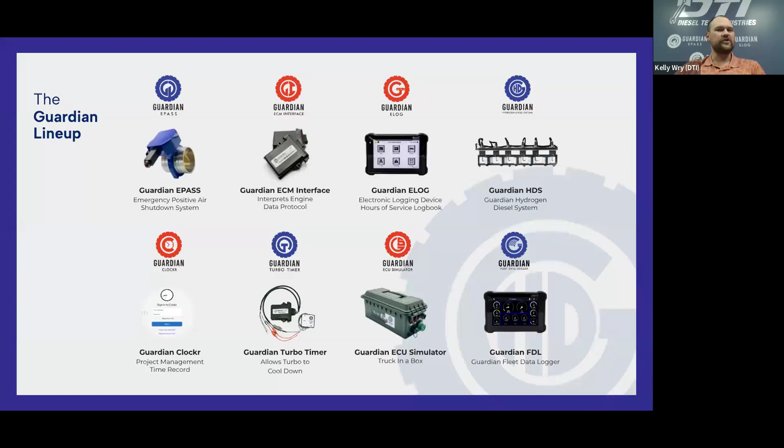So to get right into why we're here, of course we have the regulatory requirements to reduce greenhouse gas emissions by 2030 and 2050. On the Canadian side, our provincial or federal government went with net zero across the board. The assets are super expensive and they just don't fit in a lot of situations, and growing out that hydrogen infrastructure doesn't happen overnight. So what we ended up doing was maximizing the economics for fleet operators and giving that competitive requirement for everyone across the board. So if you're a fleet of 100 or you have 2 trucks, this is an option for you. It's very cost effective for what you get on the back end of things.

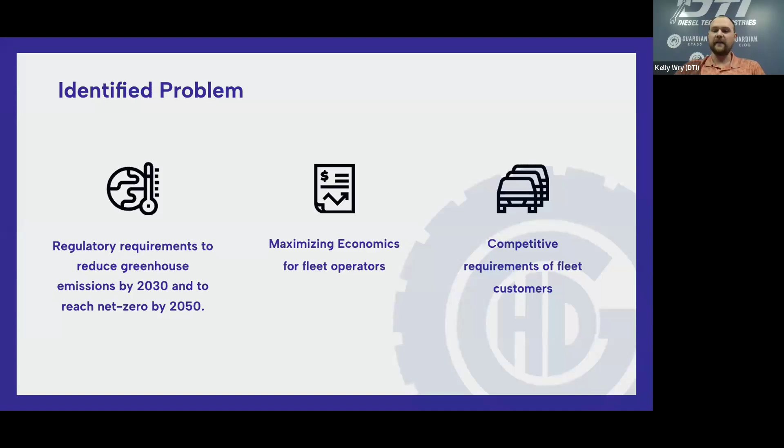So with that, our solution has 7 main components.

On the electronic side, which basically operates the mechanical and safety side of things, we've got the Guardian Hydrogen ECM, the tablet, and the dashboard. These are all integral parts of that. They're performing the injection and also handling the data collection and displaying of your reductions.

Then we have our mechanical side, which is the cylinders and the hydrogen diesel retrofit kit itself, and some of the safety systems we have on board, because safety is our number one priority. Most of our products are around safety. One is onboard active leak detection, and another, which I'd like to say is one of the only ones in the dual fuel space, is an active crankcase ventilation system.

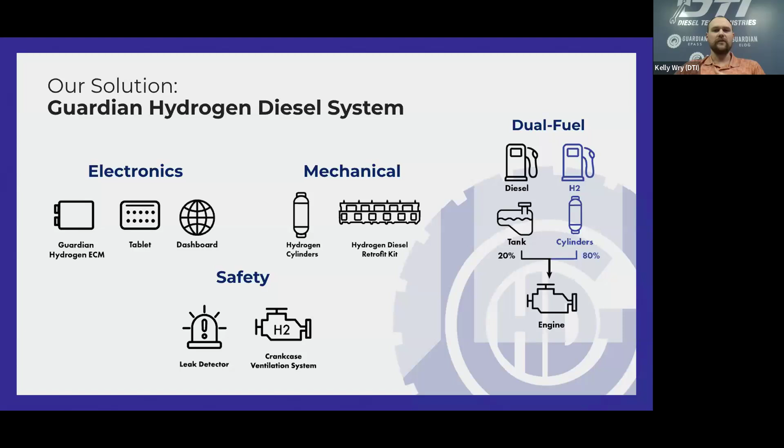I'll get more into what all these entail as I continue. Regarding the hydrogen ECM, this reads and interprets the engine data. It works with the factory ECM, so we're not tampering with factory harnesses or stuff like that. We tie in, we read, we perform our injection.

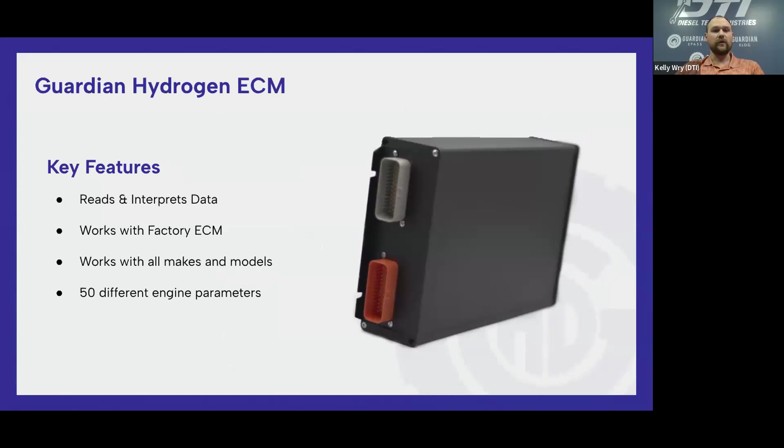It works with all makes and models. So when I say that, you can put it in a Prius, you can put it in a Kenworth, you can put it in a piece of equipment. It's going to read up to 152 different parameters, which we do record, and we use 50 of these for the actual injection process. All this is controlled with our Guardian Hydrogen tablet.

This is your heads-up display, your in-cab control center. It gives you all the details about your vehicle, all those parameters we're reading. It does update through GSM. We are in the time of having cell service in a lot of places, and it aids in allowing the operator of the unit to update efficiently to gain efficiencies as we build through the project.

The more units we have out there running, the more efficiencies or deficiencies we see, and we can tailor those into our fuel mapping. From there, we can distribute it to those proper applications. This provides the data records that send all that to our dashboard, and it aids in that AI development.

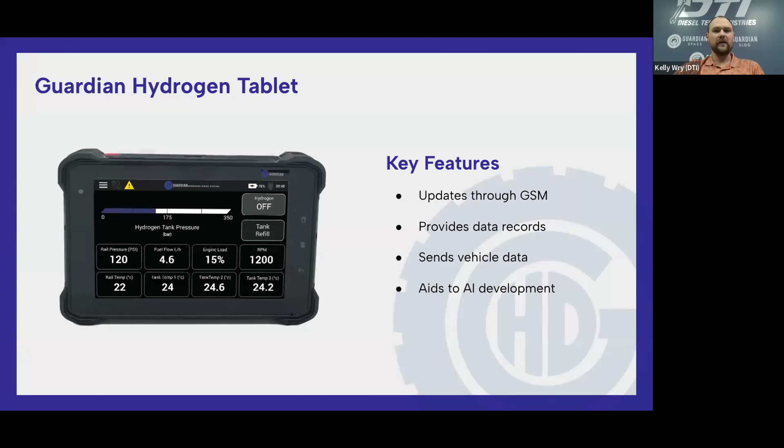To get into the dashboard, this is the hub for fleet management, budgeting, regulatory bodies, stuff like that. We have this carbon tax that we pay, and how do we get the carbon credits back for having the reduced CO2? How do you prove it? That's where all this comes in.

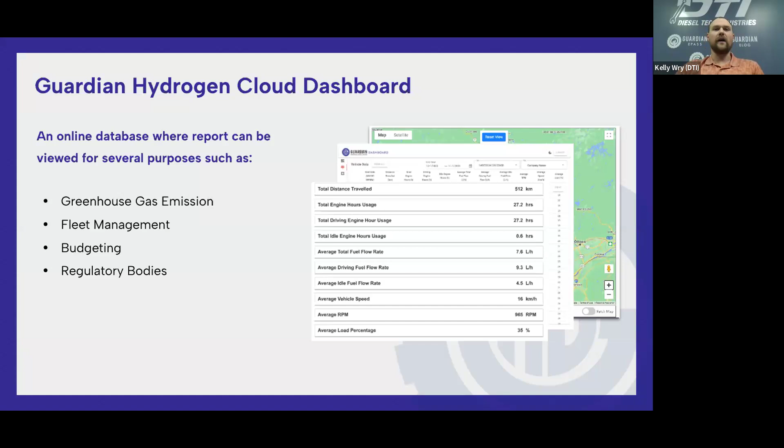We data log the vehicles with our fleet data logger, and that's where this comes in. We can get an average operation of a vehicle over a span of time, and we can actually base what our reductions are specific to that vehicle, which makes it very handy when it comes to budgeting and the regulatory side. So you're not having to hire out another position. It's kind of an all-in-one package.

So to get into how we do what we do: we have chosen the path of a dual fuel system that is a complete multi-port injection system. When I say multi-port injection, we're not fogging into the intake and letting it find where it goes. There are specified injectors per cylinder. By doing this, we're actually able to find the correct time, duration, and amount of hydrogen that enters the motor, which results in a more full combustion and less loss of hydrogen out the backside of the engine. These are 3 of the platforms we currently have on the road today.

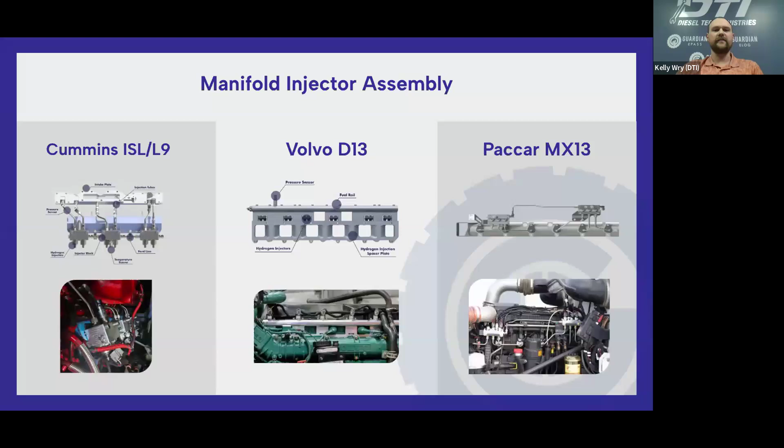We're missing a couple that aren't on here, there's just not enough space. We do have the DD15 also ready to go, and the X15 as well. But as you can see, the methodology between all these is pretty common. It's just how they adapt to the motor changes.

There's a lot going on with that one, and it's a pilot project currently being tested in California. So now getting into efficiency, there are two different things: mass replacement, and the actual efficiency of the combustion happening within the engine.

We're a load driven injection process. Underneath low load, we have really high displacement of hydrogen. There's a few reasons for doing this. Hydrogen is very thermally rich but very poor in energy density. So what actually ends up happening is as you add more hydrogen in, you kind of can't put enough in for the amount of air. A lot of heat is created. You just don't have the back end energy that diesel has.

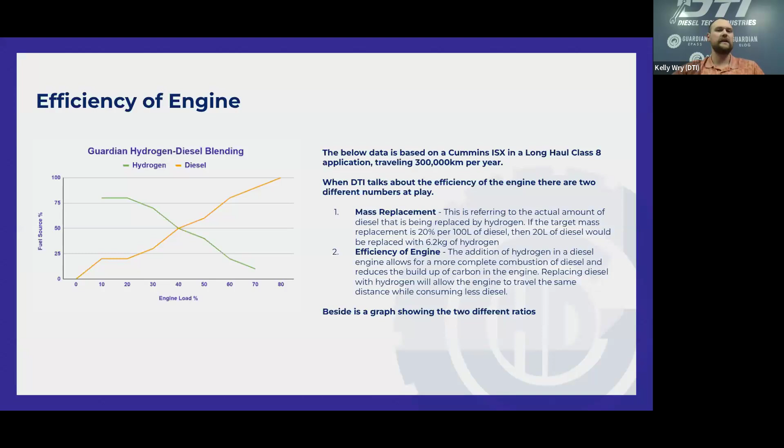So this is an actual flow rate chart, taken off the Volvo D13 at 1,000 RPM, 10% engine load. As you can see, we're running at 5.6 liters per hour. We start the injection process, and it's almost instantaneous - we drop down to a 69.6% reduction. At the bottom, we end up with a hydrogen diesel blend averaging 1.7 liters per hour of diesel consumption.

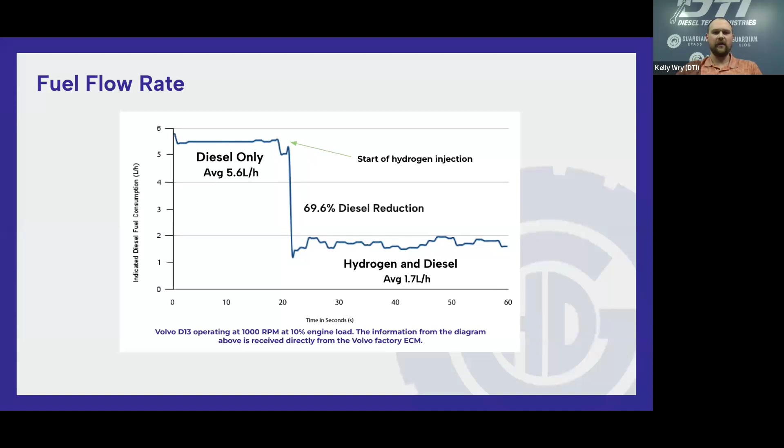As you see, there are two different fueling profiles, from the one in the top left to where the hydrogen diesel is. It's a little bit different and obscure, and that's because we let the factory ECM lead - we don't try to do more than what the truck will allow. We're constantly adapting to it, and this is in a very short amount of time, under a minute. That's how many changes our system goes through.

So we get into the emission side of things. This is where things get interesting. This is the testament to what multi-port injection can do for the applications.

At 600 RPM and 1100 RPM, we're averaging right around that 70% reduction in diesel consumption. Reduction of CO2, we're right up in that 68, 69%. And then the NOx - this is that heat management. This is where once we increase the heat of the combustion, we produce these NOxes. So we're up in that 74.9, 72.6. That is us controlling that heat and managing it accordingly.

I get the question all the time about on-road data, on-road emissions. There's a lot that plays into that. We're actually waiting to get a PEMS machine, which is a portable emissions measurement system, on board one of these units. We did have the availability of one last year. The problem is the people installing it had a bit of a misfortune with it, so it went out for repair. So we're just waiting on that. It's very hard to get that data without that instrument.

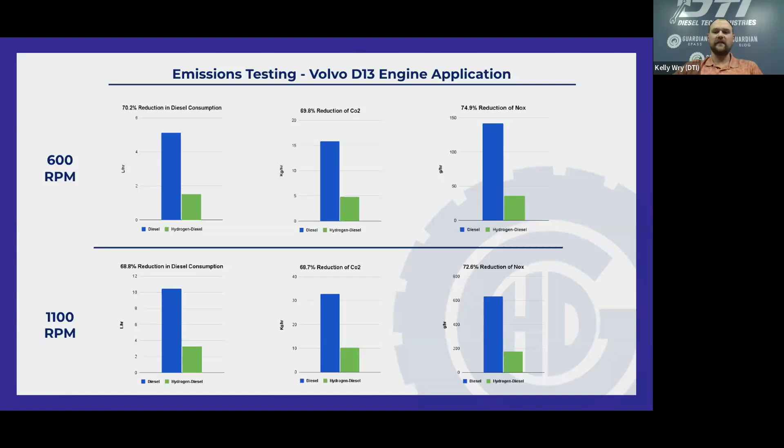To compare this 13-liter motor to a smaller engine, things change. This is the Cummins ISL L9. As you can see, just in the two different RPM ranges and load ranges, we go from a 60% diesel consumption down to a 43.8%.

Why is this? Different motors have different needs. Our system does adapt, like I said, so this is just basically what it's able to do. At 600 RPM, we're at 60.3%, and roughly just around 50% of CO2. The NOx is a little bit higher on the 600 than most applications, but as you get through it, it kind of levels back out, going down to around that 50% range.

So like I said, we're working through getting these applications on-road tested. It's just that instrument is hard to come by nowadays.

So that is to be brought up in a later conversation.

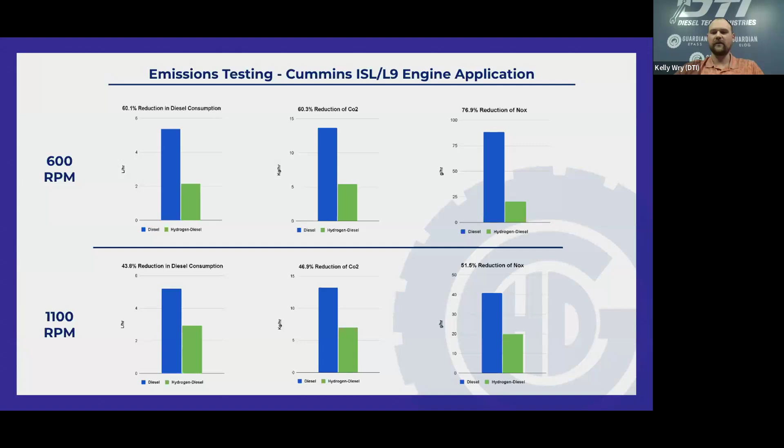When it comes to hydrogen, a lot of people have knowledge now, but on the backside of things, it's really the golden fuel at the end of the day. Yes, we're reducing carbon load on the motor, reducing NOx, SOx, CO2, things like that. But what we also get through the combustion process is reduced maintenance cost.

The reason for this is, one, we take the carbon load off the motor. The second reason is hydrogen does three things. One, it gives energy for propulsion. The other two things it does: the exhaust through combustion becomes water.

Water turns to steam. Steam in a diesel motor is not a problem. We've been doing water injection for lowering intake air temperatures for years, and the amount of water induced back into the motor is very minimal. But that water now becomes steam, and steam is amazing at breaking down carbon.

So these motors running DEF, SCR systems, and pretty much all tier 4 engines have a lot of problems with carbon. We're breaking it down because it's recirculating that carbon back through the intake, and we're getting a lot of problems that way—it's really abrasive. On the other side, we've got the emission systems.

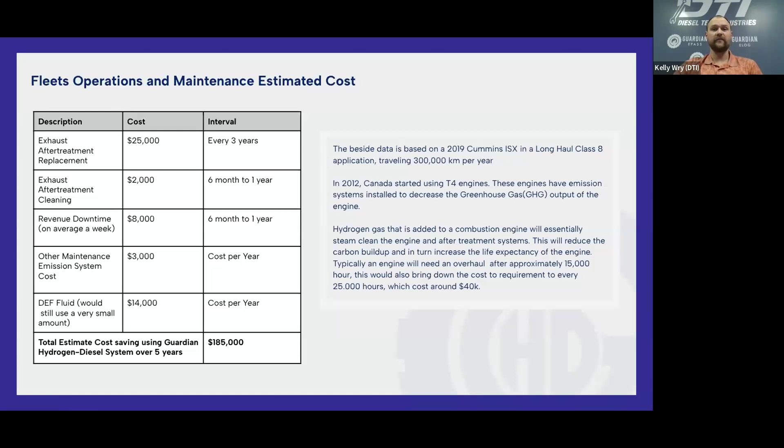So we get into the regulation side. Right now Canada—and I'm not sure about the US—is very in limbo with regulations on what falls underneath that hydrogen umbrella. Right now we are using the EC79 certified components and regulations.

Our hydrogen storage tanks are Transport Canada certified, and they fall under the HGV2 or the European R134. We use CSA and ANSI approved TPRDs, which are thermally activated pressure relief devices. In the event of a tank overheating, we try to mitigate this by putting covers and such to take direct sunlight and UV off the tanks.

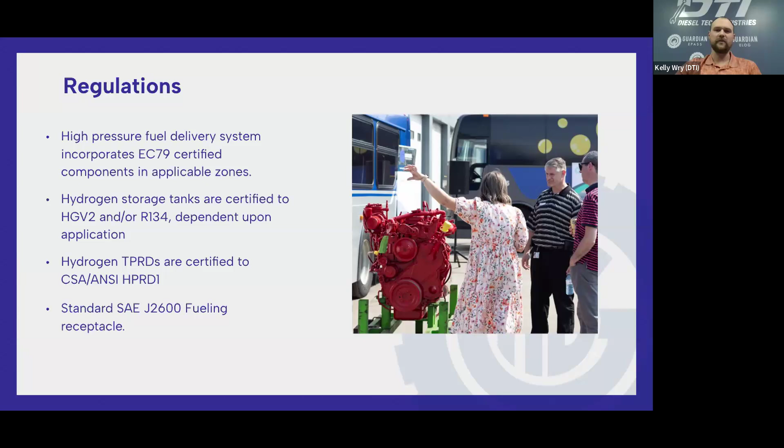This allows for a controlled off gas or burning in the unfortunate event that something may happen. We also use the standard SAE J2600 fueling receptacle for ours, so it's standard across the board for most commercial applications.

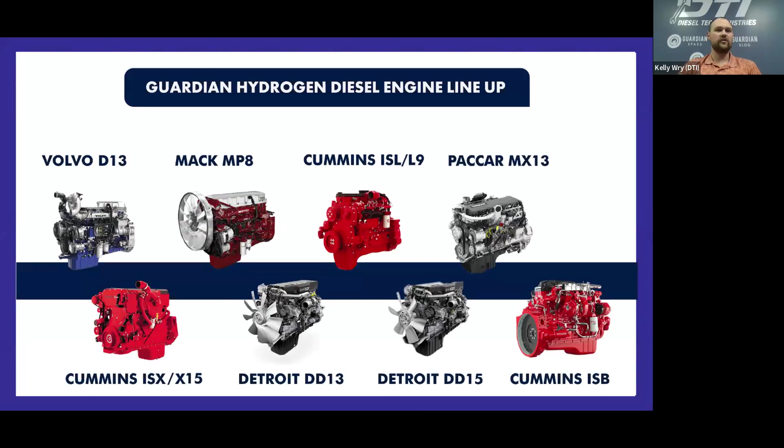So our Guardian Hydrogen lineup right now—pretty much everything on this is completed or in the pilot phase. The only two exceptions are the DD13 and the Cummins ISB, which are currently under development. Just so everyone's aware, this project started February of '22, so we've come a long way in a short amount of time.

Some of our partners—just to note, a bunch of our project partners have actually been involved in this or done conversions with us. And some of our connections—we're pretty roped into the hydrogen community, not just in Alberta but right across Canada, and we're actually working on projects.